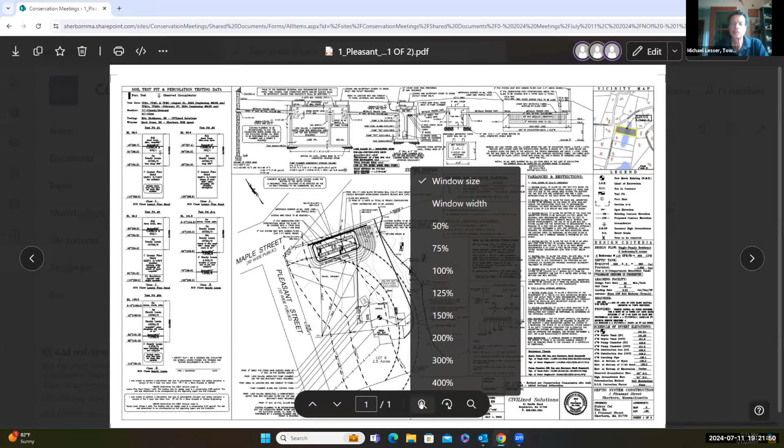Who is here? Who wants to present any of the changes? When I spoke to Eric today, he said Karen Skinner-Catroni would be here tonight to discuss that. I thought I saw her, actually. I'm not sure. Someone's connecting to audio, not yet connected. Oh okay, that's Karen. Okay, I guess maybe Joyce, you want to - oh yeah, there's 2 people here, okay, it's 2 screens. Oh, looks like she's back. Okay Karen, you there? I'm here, yep, okay.

Do you want to show what's changed or improved? Sure, yes. So as you know, this is a replacement system at 1 Pleasant Street. Eric, the engineer, has been working with Joyce and he's made all the changes that she suggested. He's made the following changes to the plan.

So this is our first meeting, Karen. Why don't you give an overview of what - oh, this is? Oh yes, okay, I saw it continued on there and I wasn't sure if I missed something. No, it was - okay, yeah, you continued it the last time.

Okay, so the project consists of a septic system replacement. The constraints in the lot are due to the 100-foot well setback. And as I stated, the engineer's been working with Joyce. Joyce had made some suggestions when she received the plan. So we put 10 shrubs in the rear of the system towards the back, yep, towards the wetland.

There was a sump pump on the site that Joyce had asked to be removed, that's been removed. Rebar bounds have been added to the plan, and erosion control has been added around the cesspool. There's no trees that need to be removed in association with the project, and there'll be no overnight stockpiling. So if you have any questions, I'd be happy to answer them.

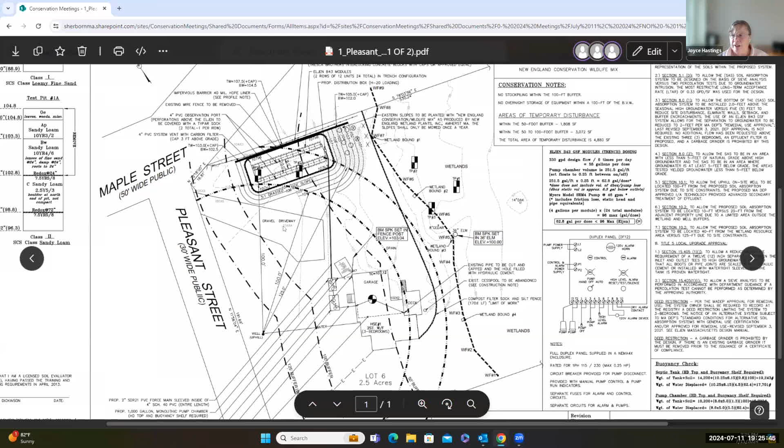Does anybody have any questions about this? I can't remember from the site visit in the wetlands whether there was some cleanup to be done around there - I think some of it was in the wetland area, behind the septic system, where there's some debris. Some of it's potting debris that can be removed from the wetland area.

Okay, we can have that removed tomorrow, during the process. Is it large debris? I don't recall. There's just a bunch of it, looked like beekeeping debris. We can remove that, or you can put that as a condition, whichever you prefer.

One other question - from the sidewalk it looked like there was an old, abandoned I assume, greenhouse type structure further into the wetlands. I was wondering whether that's something the homeowners would be willing to either remove or clean up as well. Did you say the owners were on the call, Joyce?

I see, yeah, I see them. I'm not quite sure how to pronounce the name.

So one of the things - I don't know what they're doing with it now, but we could say it can't be reconstructed or upgraded, if they want to do anything with it going forward. I'm not sure how to say that properly. That would be fine as well, as long as it's in addition to giving them permission to remove it.

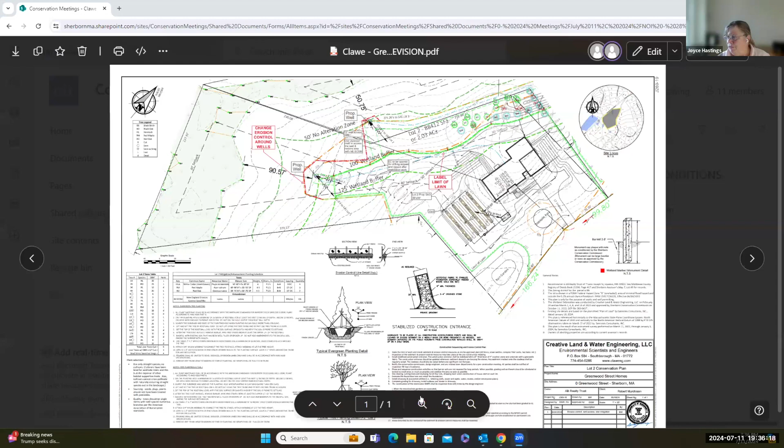So Desheng and Bob revised their plan to reflect the comments from the meeting and the site walks. One of the things we were looking to do was tighten things up. Can you see my screen? I show a line in red here, but really what we'd like to do is tighten the access around the well, to be as tight as we can around that area.

And then the only other thing we were looking to do was have this limit of lawn line labeled, just labeling it limit of lawn line. Those were the only two comments I had. There's a third good one, an extra monument added where the 100-foot buffer returns over in this area, adding one more monument in this area.

Yeah, I think that was it. Did we want, was there an issue of any sort of erosion control to the right of the access, for the well access? The line, I can't add it here, but if it came right down to the inner erosion control line. What we're trying to do is bracket the access around the well access with erosion control, or at least some sort of limit of work so that things don't stray. Does that make sense?

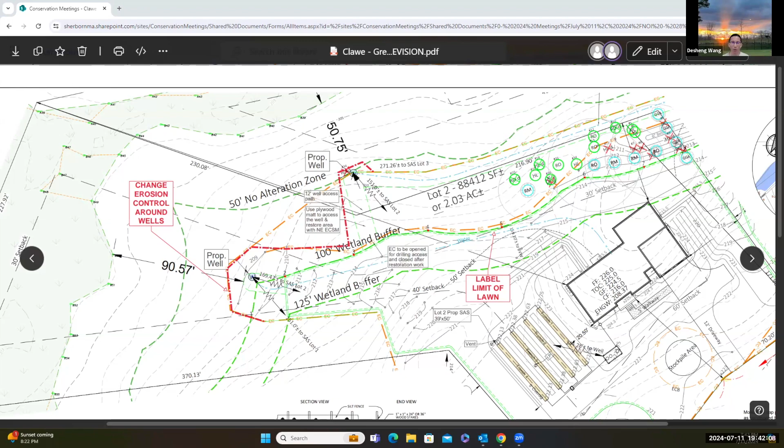We just want, as Mike suggested, to use an orange fence, which is a little bit more flexible to move around. And we all understand that any trees need to be cut, it's not going to be arbitrary. So anything marked to be cut will be cut, otherwise there will be a penalty or whatever. So actually, at pre-construction meetings, those trees would be further confirmed. I don't think they're going to arbitrarily draw a line and cut all the trees.

Here it's definitely not clear cut, even within the limit of work, especially between lot 2 and 3 area. Some of the trees are going to be saved, but the erosion control is further down, while the limit of the lawn is further up, almost at the property line. It's a bit subtle compared to the traditional way of doing the project. But I think the commission made a really good effort to still allow us to do whatever's needed, while trying to eliminate any future damage or impact. That's why if you look at these layers of the work.

Let me stop you so we can get to completion on this particular point. I believe we could try to pull it in as discussed, but maybe in the conditioning we put in some wording about the fact that during the pre-construction meeting, when everything is laid out, if a path with less wetland buffer zone impact is shown, that could be worked out with the agent in the field. That'd be great.

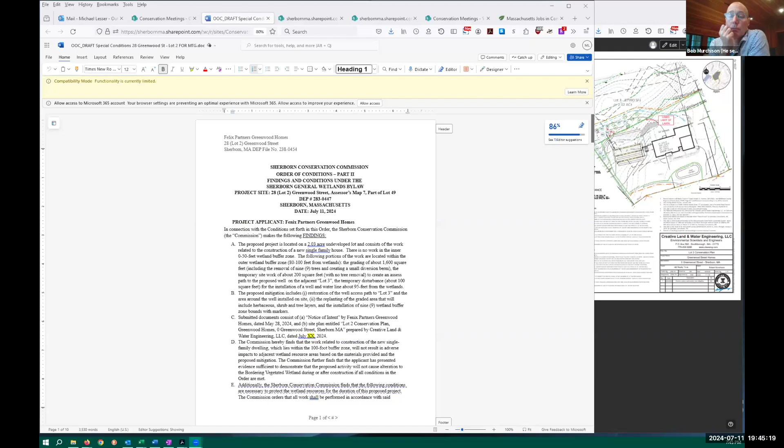Then, basically we're going to share the screen with the order of conditions so we can look at a few conditions and see if we're all on the same page here. Okay, imagine nobody can see this or read it. Let me make this a little bigger, I assume this is not legible.

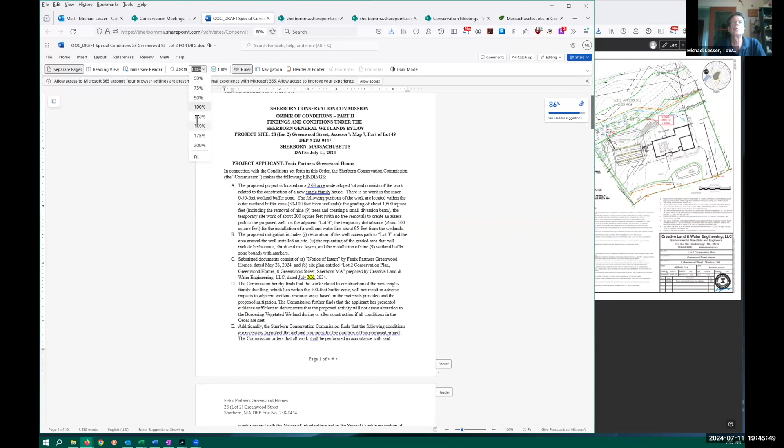Is this something people can read? Yes. I don't know, Bob and Desheng, we sent it to you very late because we were trying to get through this. No, I've had a chance to review it, Michael, and I'm good with it. Okay, so you had no particular issues with it, okay.

Then for the commissioners here, and also for the audience, you can see that essentially in this project, a lot of the work for the wells is a temporary disturbance that will be restored. There is an area of grading related partly to the septic next door and some diversion of possible runoff. That area, about 1,600 square feet, will be replanted so it will still remain buffer zone, though it'll go through a somewhat of a transformation.

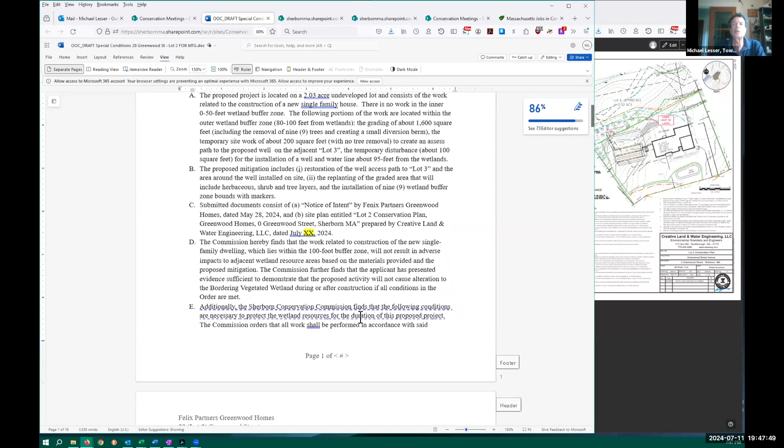So in some sense, all of the buffer zone area, because the access areas to the wells will be abandoned and just let go back natural, the buffer zone will essentially remain intact if all the conditions laid out here are met. There'll be some tree cutting, but that'll also be replaced, and it's all in the very outer buffer zone. Therefore, this mitigation would avoid any problems with the wetlands.

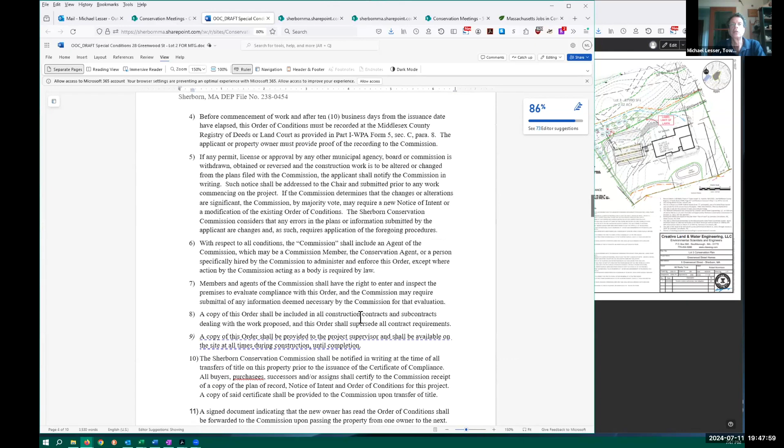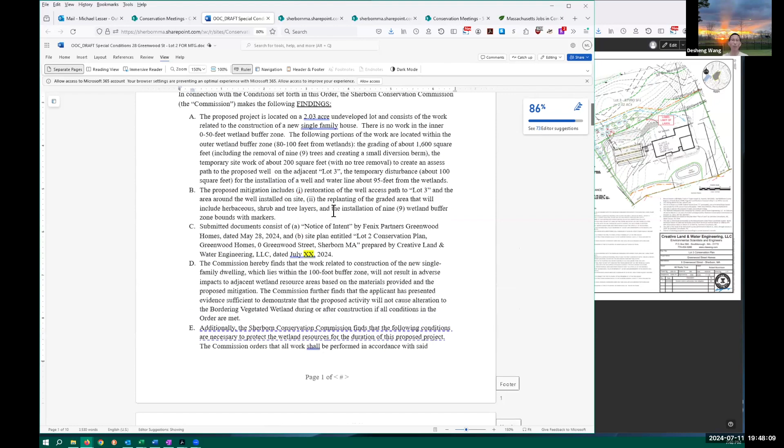I'm scrolling down, did anybody have any issue? The conditions? Just before I forget, one thing is about the address. I think Bob can confirm, unless the town assigned 28 Greenwood to this lot, as far as I know, we have that on the NOI on this order.

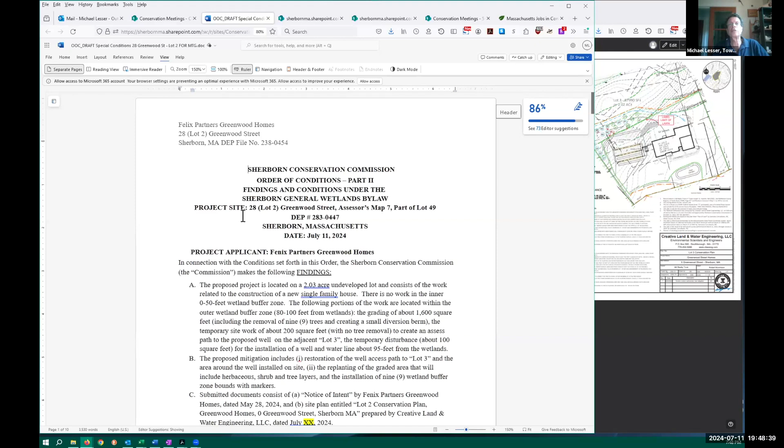Yeah, I guess, Michael, what we can leave it there, it's okay, but Desheng is right that I've stopped using those numbers because the town is in charge of assigning those numbers to the lots. It's inappropriate for me to decide what's 26 and 28 and 24. Oh okay, so you're saying that we should just drop the number on Greenwood and just call it lot 2 and lot 3, I think is better, so there's no confusion. I realize I shouldn't have done that originally, and I'd like to reel it back in.

Sure, we will clean that up there.

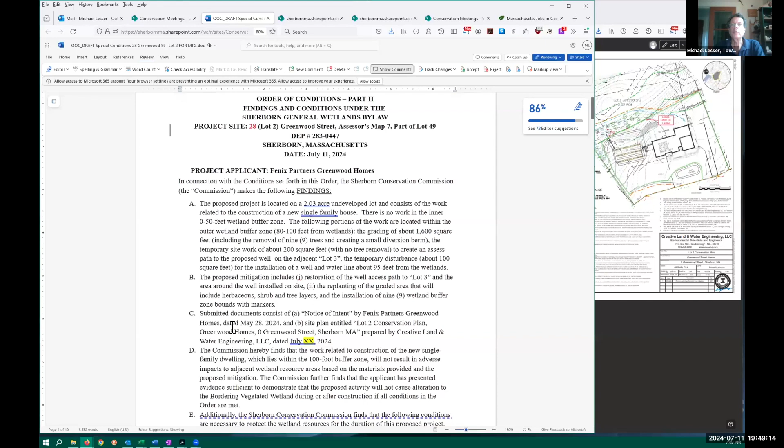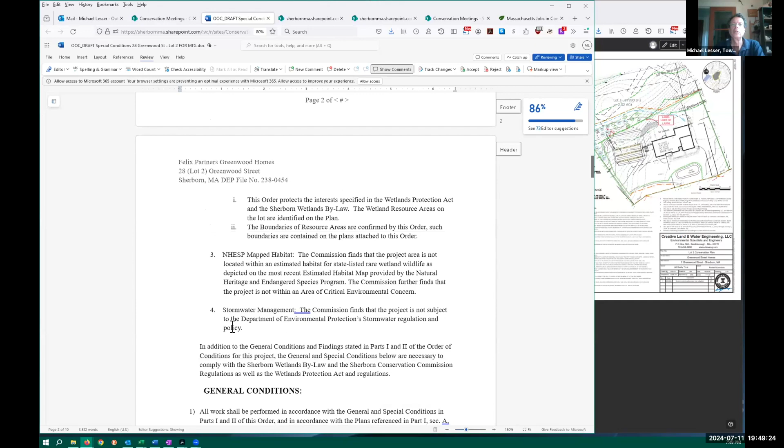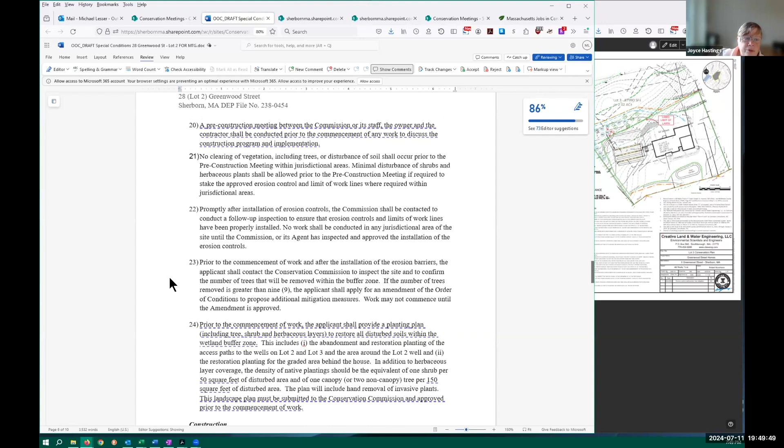Members of the commission, I don't know who managed to read this thing, it was prepared only later today. I will highlight, this is just a simple description up front of the special conditions that we deal with. There's erosion control, there's a pre-construction meeting. I think the pre-construction conditions are unique to this one, and you should go over those. Well, the most unique one is, let's see, all of them. I guess most of them are fairly standard.

Yes, up until the pre-construction. There's a pre-construction meeting, there's no clearing of any activity before, there's the erosion control. Those are fairly standard, it's condition 24, whereby once they've staked out everything for erosion control and they've done work and they can mark where all the activity is going to be, at that point the applicant will have to submit a planting plan for any of the disturbed areas. And that would cover, as it says here, the area to the wells, as well as the graded area.

And there's a specification about some of the minimum density of plantings that would have to go at the herbaceous, shrub, and tree level to handle all of that, as well as doing some invasive removal. This plan will then have to be implemented, and they'll have to go through 2 growing seasons to make sure it is in a condition that will make sure these planting plans are effective in restoring the buffer zone.

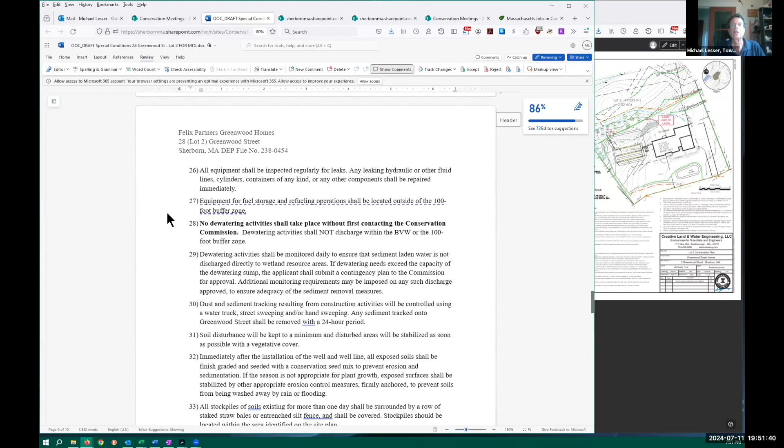These are fairly standard about all the issues about when drilling the well, keeping stuff out of the buffer zone. On this lot, it's a little simpler since the well is right at the edge of the buffer zone.

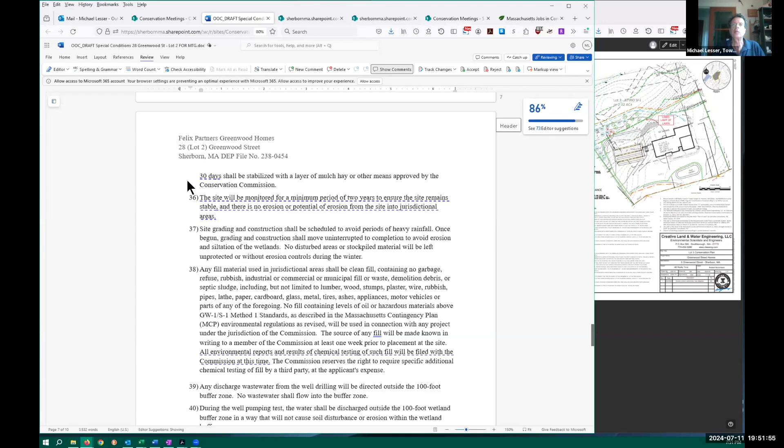And Michael, yeah, I did have, when you get there, I just had one issue I want to talk about with you related to the testing of fill. So whenever you get there, let me know. We can talk. Yes, I was waiting for that. Yeah, exactly.

And there we are in condition 38. Yes, so I didn't think what's written here was very clear. And if it means what I understand the rules to be, I'm fine with it, it's just it wasn't clear to me. So my issue, as you know, is the testing of fill. I don't object to it, you have a rule that says fill needs to be tested in the jurisdictional areas, and I'm just fine with that.

But what I'd like to do is use fill from the site, because obviously when you build a house you dig a hole, and you have fill, and that's the fill that I like to use in the jurisdictional area. That way there's no question, and we get out of the testing regime. To the extent we need fill from outside the property to go into the jurisdictional area, we will test it as your rules indicate. But I just wanted to clarify that it's external fill that we're talking about, I guess is the word that's missing for you.

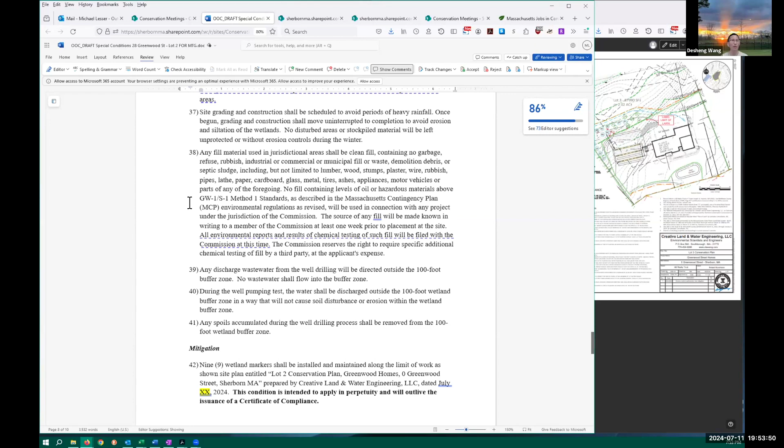Well, it wasn't clear to me that this wasn't suggesting that we needed to test any fill coming onto the property, and that's not what the regulations say, as you and I have talked about many times. What do you mean when you say any? It said if you go down to maybe imported fill, 38, and if any imported fill material used should be clean fill, I think that's it.

Well, here's the language that I think is problematic. If you go down about 2/3 of the way, there's a sentence that starts 'the source of any fill.' The question is, source of any fill will be made known in writing. So that applies to fill that's going into the jurisdictional area, and we're perfectly comfortable complying with that condition. But it doesn't particularly call out that that's for fill in the jurisdictional area, it just says the source of any fill.

Okay, as opposed to the source of any fill used in a jurisdictional area? Sure, that's perfect, yes. The first sentence says, oh I see, because you want to clarify the last sentence, because the first sentence says any fill in jurisdictional areas. Right, but it's okay, 4 or 5 sentences, we don't have to belabor it. As long as we're all on the same page, I don't really care. No, but I don't mind adding, it's a good clarification. Source of any fill.

Used. Whoops. Will be used in juris areas.

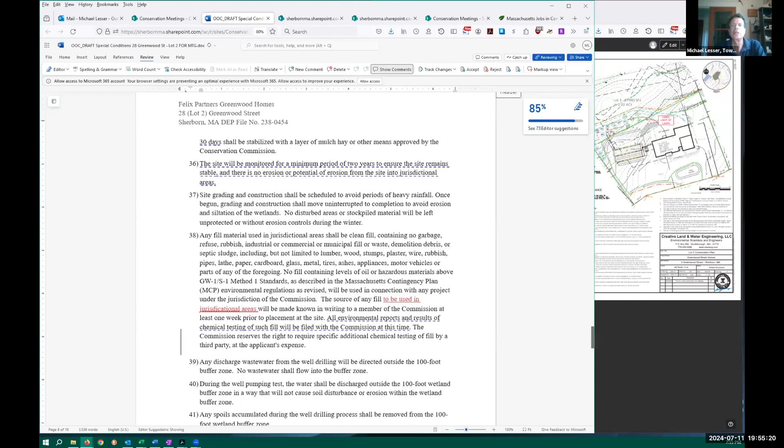Sure, I got a spelling error, but don't worry about it, we'll clean that up. Okay, are we addressing that issue? Is that okay? That's great. Thank you, Michael. We have another edit later on that somebody else caught, that Jacob caught here. I'm gonna clean this up here.

Okay, let's get rid of the double negative. And actually, Michael, I kind of have the same issue, not that I never use anything on my own lawns or shrubs in terms of fertilizers or pesticides, but your regulations are, and I think what you're trying to say here is that the homeowners can't use any of that in the jurisdictional areas.

You're not asking. It says here, within the 100-foot buffer zone or wetland areas, and I don't think it says that down in paragraph 45 either. That's what it says there. It's there. Ah, okay, that's what it says. So maybe, my apologies, I was reading it too fast.

Okay, and here, in this part related to the planting plan, there's a survivability rate over the 2 years, and there's also the wetland markers that are noted here. Most of the others are fairly standard conditions.

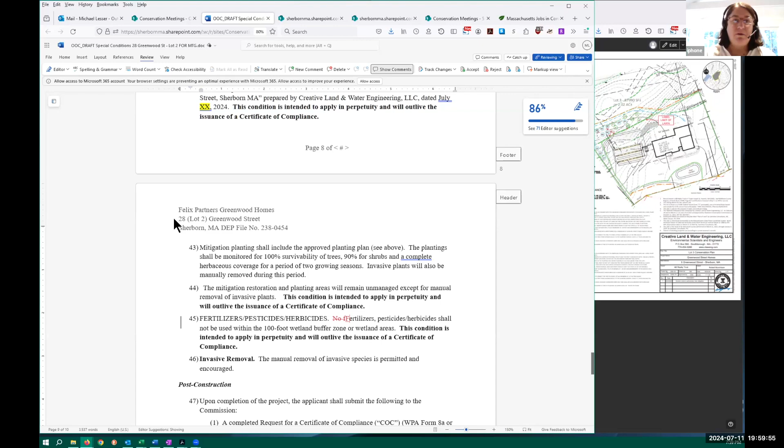If any changes happen in the property lines, they'd have to come back to us. So would there be an order of condition suggested if there was some significant alteration of the property lines, that would be considered a significant change? Not sure it would be significant, you'd have to review it to determine what it was. Yeah, I would think any changes to the plan have to be reviewed. Yes, we have that language, it's standard language for all of our orders of condition. And we're happy to comply with that, Michael. In general, if any property lines change, they have to come back to us to review. Okay, thank you, we recommend that.

Okay, Desheng, I just want to clarify the additional wetland monument, I think there's a little confusion. We have a 125-foot buffer zone on it, which is outside jurisdiction, so we already have enough. Monument Mark 1 is set at the 100-foot buffer line. The limit of lawn was put at 125. That corner you want to put an additional one - if you're looking at the plan, the one we talked about is 125 foot, so it's not really in the jurisdiction. That's already the limit of the lawn, and it's labeled on the line close to the lower left corner.

We had asked - I think you misunderstood where we put it. We're asking for it on the 100-foot buffer zone. We have one already there, by the well, but not between the well and the property line heading down on the plan. I think the red line goes through it - bound number 1, right. Yep, it was there, it's just hidden underneath. Okay, I think the line, we'll probably adjust it. Point taken.

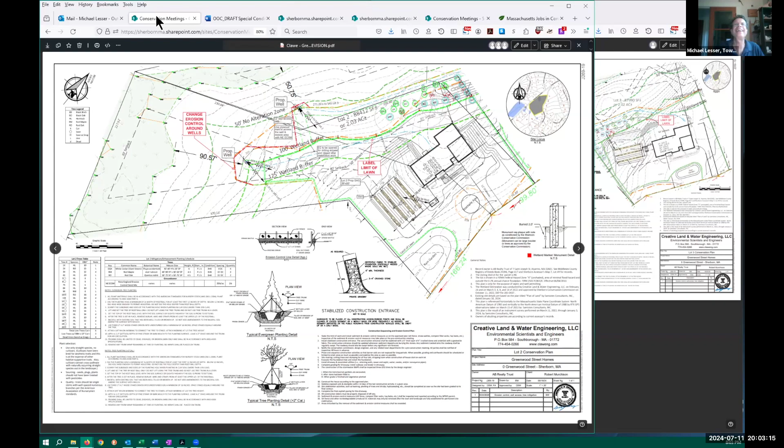I move to close the hearing on lot 2 of 0 Washington Street for the construction of a new home. Let me try that again - which lot are we in here? You said Washington Street, because that's what it's called. Oh okay, right, so it should be called Lot 2 Greenwood Street, I think. Is that what it is? Well, the 0 Washington Street is the entire property. Right, and this is Lot 2 Greenwood, is that what it is? I'll go back and redefine that. Oh okay, fine, now I see the difference - it changed from before. Or I extrapolated - okay, I take back the other one.

I move to close the hearing for the construction of a new home on lot 2 of Greenwood Street. Second. Any further discussion by anybody? Okay, roll call vote.

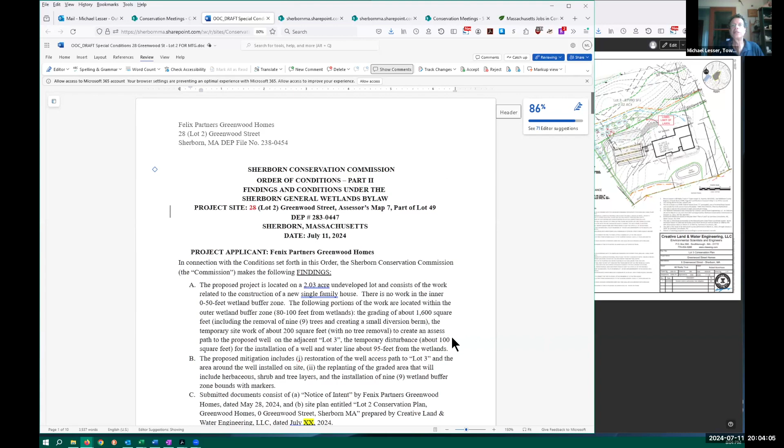Michael, let's see here, hold on, stop here. Michael, aye. Terry, aye. Kurt, aye. Jacob, aye. Courtney, aye. I think I got you all in the maze of things, okay.

I move that the findings of this hearing are that the proposed project on a little over 2 acres for the single-family home construction and related work is permitted if it follows all of the conditions as laid out in the order of conditions, which will protect the wetlands from any adverse impacts and restore the buffer zone to its functional value as it is today. How's that?

Second. Okay, any further discussion? Hearing none, seeing none. Okay, roll call vote. Michael, aye. Terry, aye. Courtney, aye. Jacob, aye. And Kurt, aye. Okay, that hearing is opened and closed.

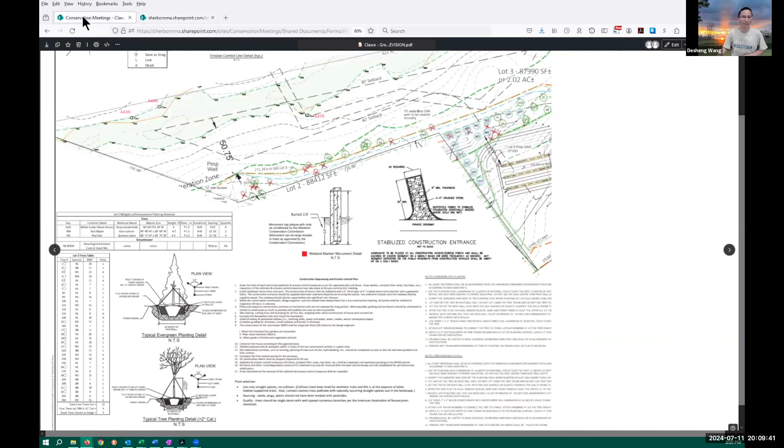Okay, point taken. We will pursue that a little further. This is lot 3, the order of conditions for lot 3.

So I guess we're gonna have to get, I wasn't sure what the exact width of that is. Is it 5 feet? What's the width of your area for the water line? Ten feet. I mean, if you need to get a machine through, we all see those boulders, 5 feet isn't going to work for a machine, maybe one of the days we can have that. I saw different numbers in your things here. I would use 10, Michael.

And is it still 200 feet from that? Probably about 51, I can probably measure it out. We'll get that filled in afterwards. Okay.

Okay, for the commissioners and then for the audience, this is the draft order of conditions. Basically, there'll be this work here and the work along here to put in the well line, which will be temporary and then restored.

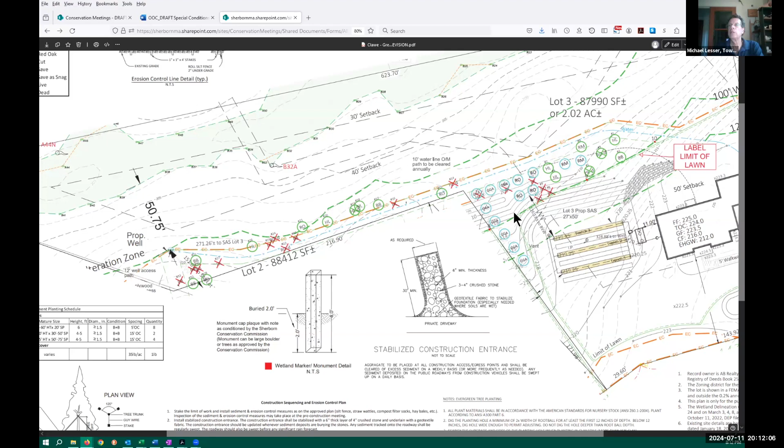And that will also be returned as unmanaged buffer zone, so that in the end, all of the disturbance in the buffer zone will be restored or replanted. Okay.

That length is 361 feet plus or minus, so the length isn't exact. It's all right, I use the word 'about' often. Okay.

Okay, I don't know if commissioners had anything, before we go on. Again, these are the same standard conditions that we talked about through the last one and in general. I'm going down to the more special conditions.

Michael, the same typo exists in the fertilizer one. Yeah, I'll get there. Okay, this is the...

Here's the condition about having a planting plan for the graded areas, as well as a restoration planting plan for the access path to the well, around the well, and restoration of the water line disturbances. There'll be two types of plans put forth for our approval once they've staked everything out, so we can see what's going on and confirm all the trees that will be removed.

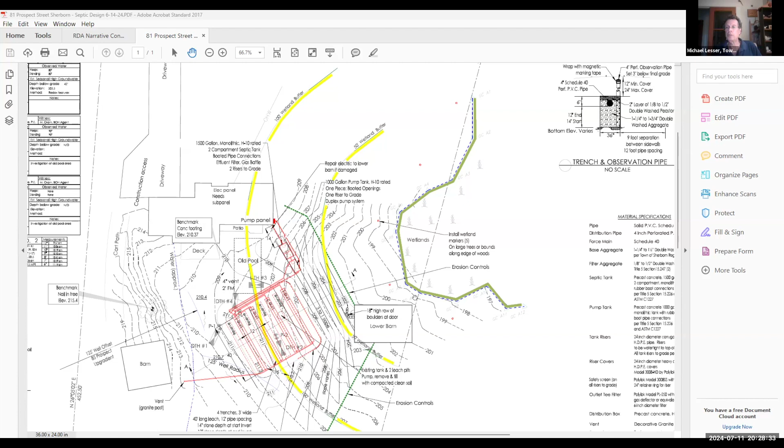Okay. Coming back to the commission, any other questions before I make a motion?

I move that we approve this project as a -3 with the conditions of the monuments, the no mow area, and our standard ones about where vehicles are parked and refueled.

So, are there any other special conditions, Joyce, beside that? No, none other. Okay, that's the motion. Do I have a second? Second. Thank you. Any further discussion?

Roll call vote: Michael, Aye. Jacob, Aye. Kurt, Aye. Courtney, Aye. Terry, Aye.

Okay, we'll get that out. Very much. One more down. Okay, we will now have our— now we're only 40 minutes behind.

Okay, we now have— let's see if I can get the right thing here. Next one here. And there we go.

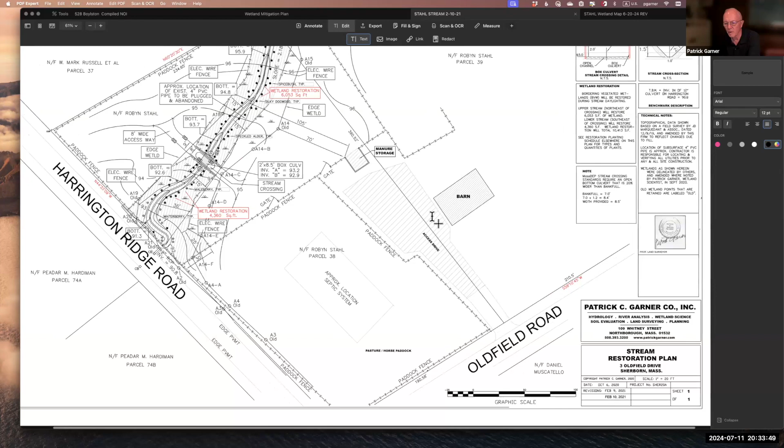Okay, can you guys see that? Yep. Yes, I want to be in the other place. Okay, so this is the plan that you based your February 2021 order of conditions on.

And essentially, it's going to look complicated, but it really is not too complicated. This is Harrington Ridge Road, and it's at the intersection of Harrington and Oldfield. And this parcel right here is a paddock.

And when Robyn Stahl purchased this overall property in 2019, I believe it was, there was a wet, boggy area right in this section here. And she hired a contractor who came in and brought some fill in and filled it, turning the whole thing into an upland horse paddock.

The commission received a complaint through a fairly lengthy process.

My firm participated in filing a notice of intent to remedy it. What we essentially did was propose a stream, a little intermittent stream right here, bordered by wetlands on either side. The rationale for that at the time was that this little pipe right here, marked as existing 4-inch PVC pipe, is the sole source for the hydrology on the site.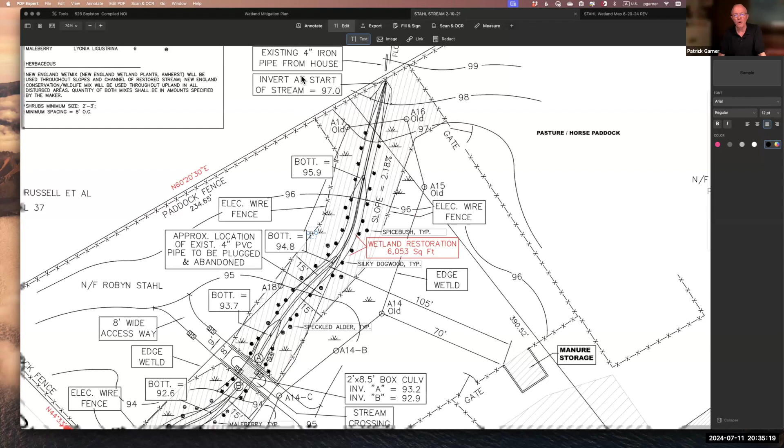So in the spring, particularly for about 4 to 5, maybe 6 weeks depending on what kind of spring we have, this pipe flows and flushes water into this area, which then flushes eventually down to a ditch here. The ditch terminates at a little cross pipe culvert, which then flows under Harrington Ridge Road and across the street. So that's sort of the hydrological pattern here.

If we go back maybe 30 or 40 years before Robyn acquired it, the flow coming out of this iron pipe was picked up by clay tiles that ran under here and flushed out to Harrington Ridge Road. Those were probably installed in the 1950s, could have been earlier, but at some point they failed. They weren't cleaned out, weren't maintained, and so the water no longer flowed through the tiles. It just flushed out and saturated the ground through this whole section.

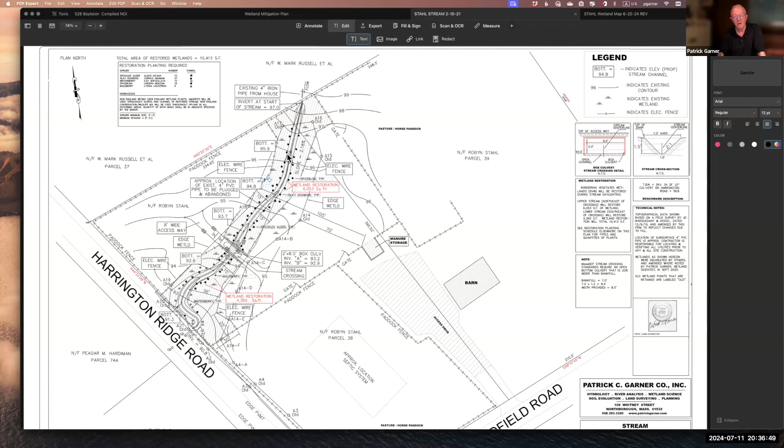The contractor who was hired in 2019 and 2020 to do the work through here installed a 4-inch PVC pipe that intercepted the flow coming out of her abutter's property and ran it all the way down in a straight line to the pipe here. So that's sort of the background on what the existing conditions were, and then what the new property owner did inadvertently, and what we had proposed at the time to remedy the lost wetlands.

We had estimated, based on flagging that ran through this section, that the fill amounted to 10,413 square feet. So it was fairly substantial.

As I noted, the replication has not been built, and part of the reason was that both Robyn and I have worried about the success of this were she to build it as it was approved. I'll go into a little detail to show you what the worry was.

First of all, the pipe itself flows only in the spring under high groundwater conditions. For instance, when I went out on the site a month or two ago, it was dry, and it's been dry through most of the winter. So consequently, if this were built with bordering wetlands as we had proposed along this intermittent stream, there would be questionable hydrology.

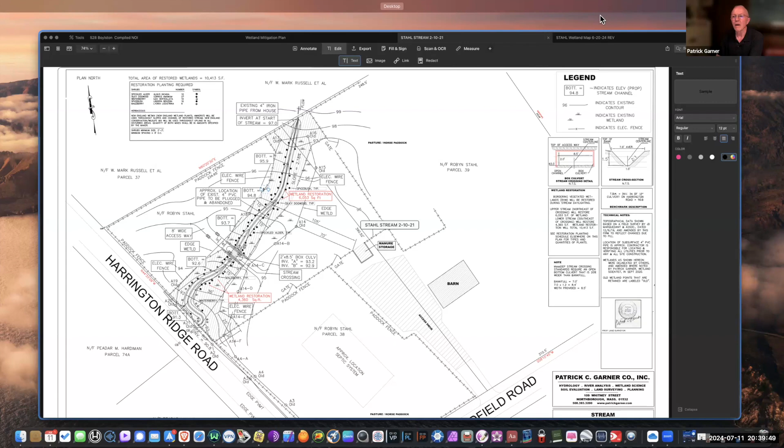Now remember, this is our high point way up here with an elevation of 98, and this is our low point down here with an elevation of 92 at the juncture of Harrington Ridge. So I redesigned this, and the redesign looks like this.

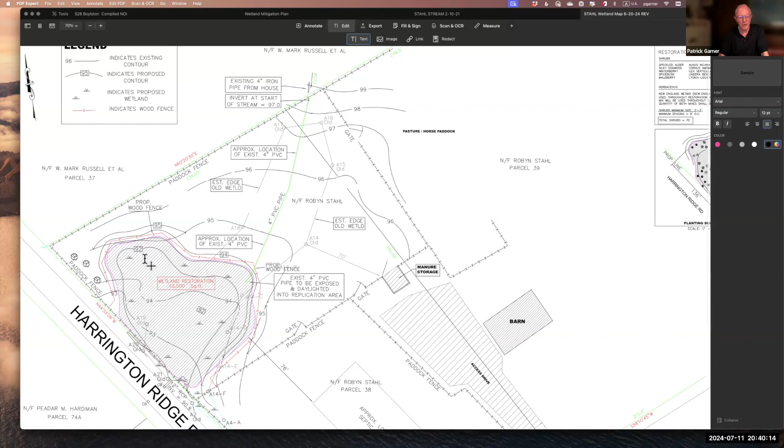This is that high point right here with the iron pipe and the existing 4-inch PVC pipe. What I proposed was not to create this upper rising wetland, but to put it all down in this low point, down in the bottom of the paddock.

The elevations, as you can see now, are 93 here. So we have a 92 elevation proposed that goes all the way around here and basically mimics and echoes the elevation of the existing wetland right down in the section.

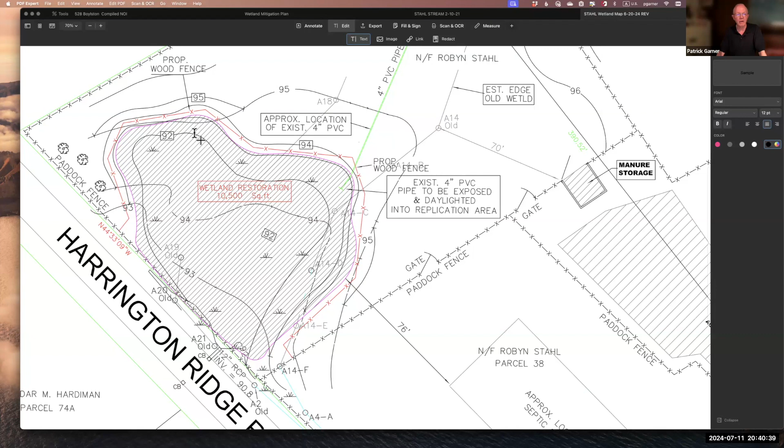So this would require an excavation of 2 to 3 feet through this section to get down to a point where we had hydrology at 12 to 18 inches below the excavated surface.

The amount of wetland we're proposing is slightly more than what the order of conditions required in 2021. I say slightly more by 100 square feet, so it's not substantial, but it's larger.

The excavated area would have year-round hydrologic conditions that were far more favorable than the proposal to drive it up this channel. Secondly, the PVC pipe would be left in place and then chopped off right at this point, daylighted, and allowed to flush into this new replication area.

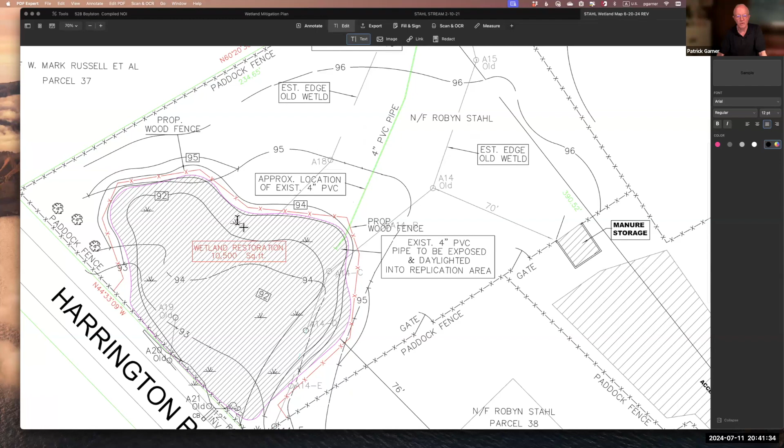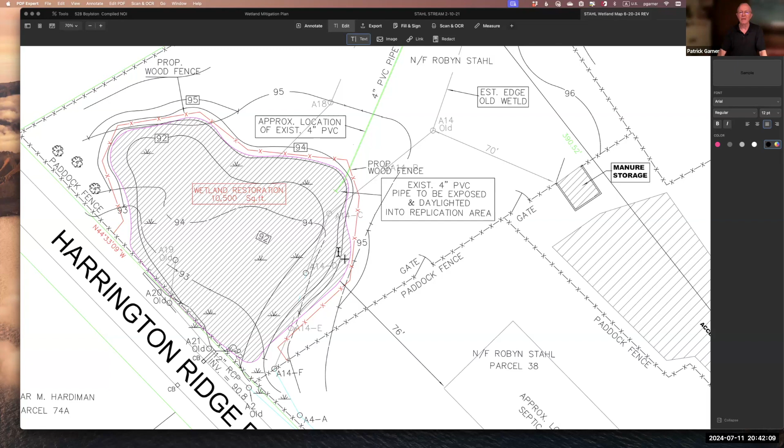So we wouldn't be creating any further disturbance. What we'd be doing is shifting the replication into an area that's far more likely to be successful, and allow us, during the period of time that the commission holds the property owner to a successful replication percentage, to actually be able to meet that without homeowner grief.

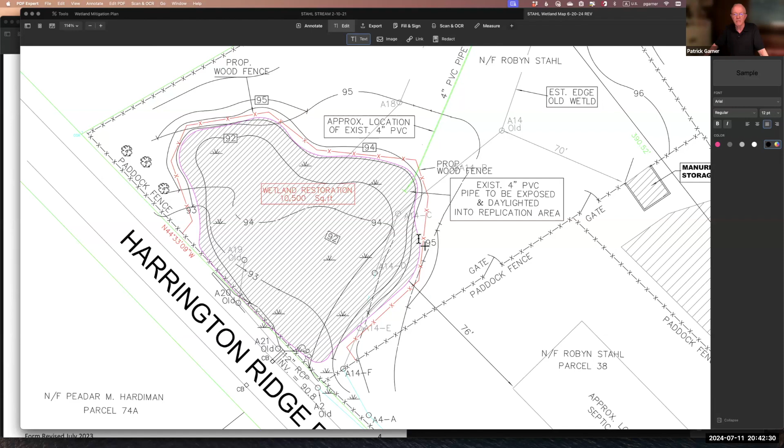So that's the story in a nutshell. Again, I think that's a pretty good picture of what we're talking about here. Let me get back to this. There we are. I'll be happy to leave this up and take any questions from anyone. If I've lost you, please let me know, and I'd be happy to go back over anything I've said.

Okay, thank you, that was fairly clear. Yes, I do remember the back and forth and around the world that we did years ago about trying to get to this point. Okay, Joyce, why don't you go, and then Terry.

Patrick, my understanding from reading the regulations, and I've only researched this just now because you brought up the date, the COVID Extension Act is only valid for permits that were issued before March 10th, 2020.

Okay, so Joyce, I have not done this research myself personally. I'm not trying to stop anything now, but let's go through this and we'll have to review it before we close anything out. Robyn contacted me along with Greg McGregor, and she was specifically working with Nathaniel Stevens at Greg's firm. Nathaniel gave her that legal advice on the timing of this, so I suspect it's accurate. That's not something I've tried to corroborate myself, but Nathaniel's a detail guy.

I'm looking at McGregor's calculation sheet, which I also brought up, and right on their calculation sheet it says it's valid for permits issued before 3/10/2020. So that's something we need to look into. Do we have time? This is outside of my expertise, I'm here as a wetland scientist, not legal. So does that mean we might have to do an extension? No, addition - we can't, it's expired. Oh, it's already expired? So you're saying, Joyce, that it's possibly expired. Okay, I think it expired.

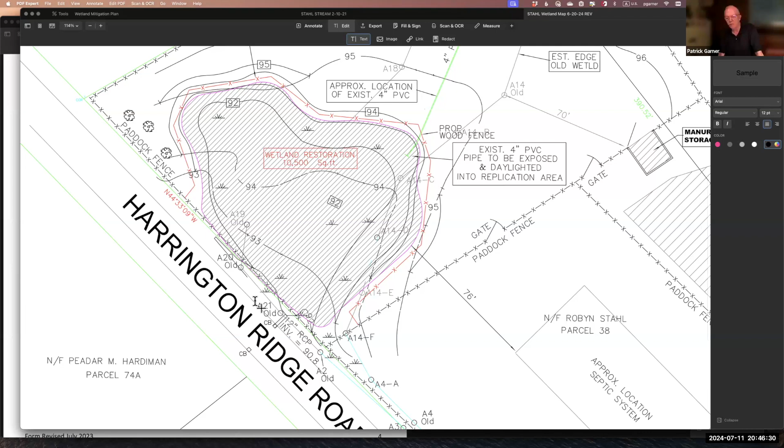If we jump back decades, as I noted, there was a clay tile pipe system that ran under here and into this culvert right here under Harrington Ridge. There's a catch basin - this culvert flows into the catch basin, flows under, and then exits and goes down the road. So what this proposal would do is take the replacement 4-inch PVC pipe that comes under here, chop it off at the point where it intercepted the new replication area, and simply allow the water to flow into this new replication area and then out again.

So other than creating a wetland in a more logical location that has both seasonal high groundwater at the right elevation, as well as being on the low spot on the paddock, it doesn't really change flows of any kind. Does that make sense?

It does make sense, I was a little in the dark about those earlier conversations. I'm also wondering about those low spaces near Harrington Ridge Road - is that actually wetland, or are we saying this is an extensive rain garden we're making with seasonal water flowing into it? It really is, yeah.

So see the points right here, A4, A4, A3. They border a vegetated ditch that runs down Harrington. It terminates about here, but it goes all the way through here, and then spills out into this culvert. And that was decided -

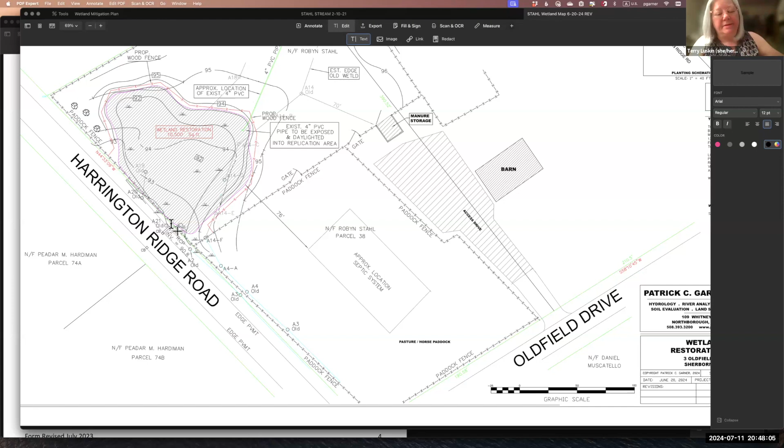that was a BVW that the commission approved back in 2021. Okay, because I didn't see any other markers on the outer perimeter going uphill. I didn't seem to see any markers there.

Thank you - you can see them here, and you can also see them here. They're marked. Okay, yeah, we were looking kind of at your red perimeter.

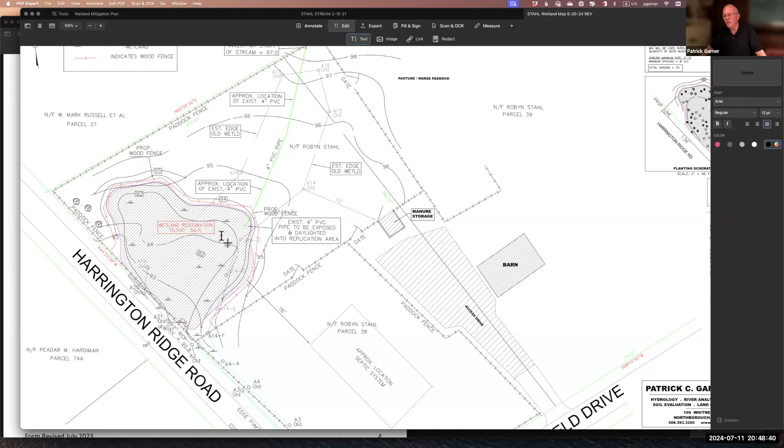Not to muddy the water here - bad analogy, but not to muddy things. This was something we spent a lot of time talking about in the hearing, because this was a filled site.

It was difficult to precisely determine the wetland edge. We went backwards through about 30 years of historic aerial photos, and it was quite clear there was wetland in here, but the photos varied all over the board. Some were just black and white, clear as a bell. Others were far more ambiguous, so it was a little hard to tell.

So I went out with a backhoe in this whole paddock area, and we did 10, 11, or 12 deep holes with the backhoe, trying to look at the soil. Got it, got it.

I don't feel you had to reiterate the whole thing for me - I'm so sorry to make you feel like that. No, that's okay. For those who are here, it's probably like 'oh no, he's back again,' but I get it if you weren't. Thanks so much, Jacob.

I guess I have a couple questions. I wasn't in the prior round, obviously, so I wonder if it would make sense to do a quick site visit at some point, just to visualize what the area looks like.

But in addition to that, for the outflow from the PVC pipe, would you need anything there to prevent it from creating a channel through the replication area? Is that one question. Well, I don't think it would be - it's a good question. I mean, essentially it would be hitting a flat elevation of 92.

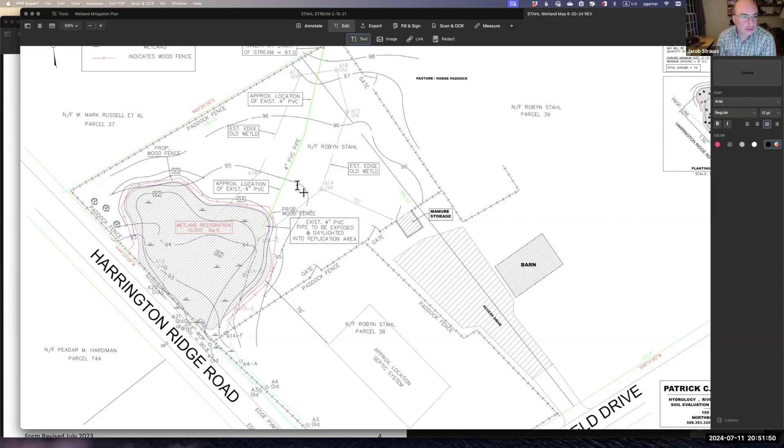Schematic right here - yep, and putting a few more because the square footage has increased slightly, we beefed up the bushes, a small factor, but you can see we're proposing speckled alder, dogwood, winterberry, spicebush, maleberry. Quantities are here - total 70 shrubs. We've dimensioned the replication area so it can actually be constructed as proposed.

Yeah. Joyce? Oh, are you finished, Jacob? Sorry.

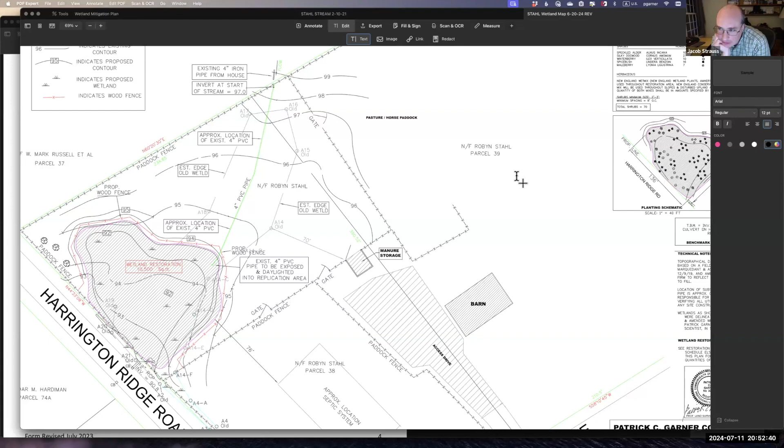And I guess, in the replication area, the idea is to remove the fill that's there now, is that correct? Okay, that's all for me. Thank you.

Joyce, I didn't say so in my presentation, but you can see this red line going around the replication area. That was my question - does it have to be so close to the edge of the replication area? Can it be out? You're saying because we wouldn't have a barrier that close to a wetland. Is it possible to give a little bit more of a buffer?

Yeah, whether it could be pulled back 5 or 10 feet out from the edge. Yeah, it could be pulled back 5 or 10 feet. I don't think that's a big deal.

All right, the other question was, would it be helpful to show the commission members who were not at the previous meeting what the previous approved plan looked like? Yeah, that was what I showed initially, that was the first thing. Oh, you did? Okay, I apologize, I already missed that.

Thanks, sorry about that. That was the one that showed the channel and the bordering vegetated wetland that went all the way up to that iron pipe, right. Okay, and Joyce, you know that when you try to replicate and you're going uphill with a replication, it's a challenge.

Understood, any other questions from people? I guess I'll speak while people think. Yes, having been through the first round of all of this, I think this is an improvement for all the reasons you said.

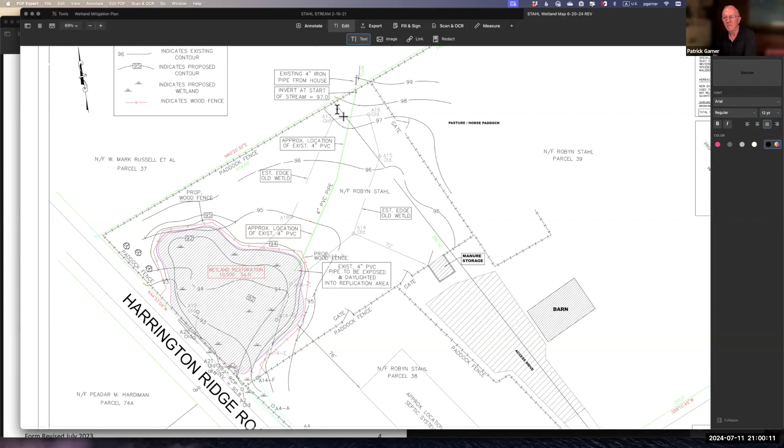No, the only thing that makes it difficult to walk in is that Robyn has run sort of clear lines. She'd be better at describing exactly what they are, but to keep geese out, many of the owners in the area have run plastic lines in rows down through the grass, and that discourages them from coming in and pooping and doing all the things geese do.

I think you can still walk through there if you were so inclined. You just have to be careful and aware that you might run into these. The great thing about this is that it's grass, not wooded. You can literally park right on the road, look in, and you've seen it.

That's not to say that if you want to drill down deeper and walk around inside it, you can't. But you'd want to coordinate with Robyn and knock on her door and let her know you're coming and that kind of thing.

But we're perfectly— I just might like to see the pipe at the top of the paddock. Okay, that's all. In that case, you probably want to have me or Robyn walk out there with you.

Because there's no flow, it's difficult to see the pipe. If you're lucky and you're out there on April 15th and it's flowing, you can find it, but otherwise it's pretty obscure. Okay, well, maybe we will make it a formal site visit, because there are a few people who want to go.

Okay, we'll work on that offline, out of the meeting. So we're all agreed that this is a good direction, and it's just a matter of refining this.

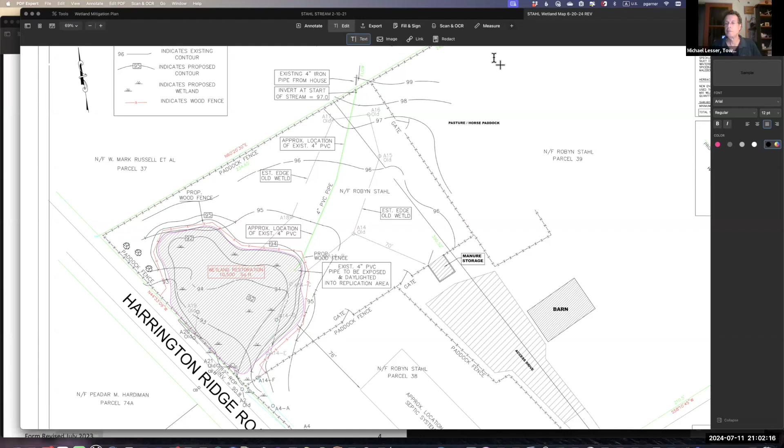Okay, anybody in the audience have any comments about this issue, this project? Okay.

Fine, so we're gonna continue this to 7:20, but we did the regulations at 7:20. We can continue those to the end of the night. And we don't know whether or not we need to get confirmed that this has not expired.

Oh, that's true too. So we gotta be careful. I don't wanna give great space to things. Okay, so we'll do it at 7:20 with the other one.

And what date are we talking about? Two weeks from now, does that work for you? The 25th. Okay. Yes. Is that okay? That works for me.

Okay, and Robyn, does it work for her? I see she's here.

Robyn, are you muted? You are muted. That works for me. Okay, perfect.

I move that we continue this hearing on amending the order of conditions for 3 Oldfield to July 25th, 2024 at 7:20.

Second. Any further discussion? Roll call vote: Michael, aye. Jacob, aye. Terry, aye. Courtney, aye. And Kurt's back, aye.